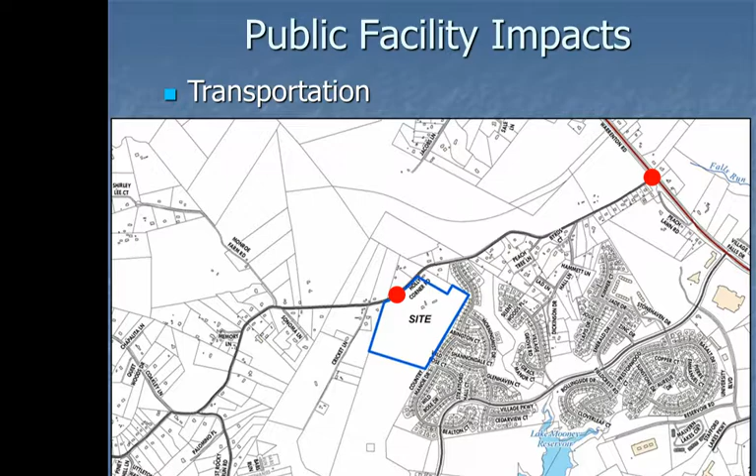Now looking at the other intersection, the Warrenton Road and Holly Corner Road intersection, the results of the TIA indicate that the site development would have a negative impact on the intersection at build-out in year 2022 if there was no mitigation. Specifically, it looks at specific traffic movements and identified the problem occurs in the eastbound approach on Holly Corner Road to Warrenton Road, identified with the red arrow.

Question in reference to the intersection: are there plans to put a traffic light there, or do you know? I'm not aware of any plans for a light there. That hasn't been determined as part of this. I understand that, but I just wondered if you knew. I'm not aware of any plans for a light. No.

This table, part of the traffic study, identifies the level of service conditions at this intersection, as well as queues, which are a measurement of the length of vehicle stacking that occurs at an intersection. The eastbound approach traffic movement is highlighted because that was identified as the biggest problem. You can see that the level of service is a failing F currently and is expected to continue that way into the future without this project.

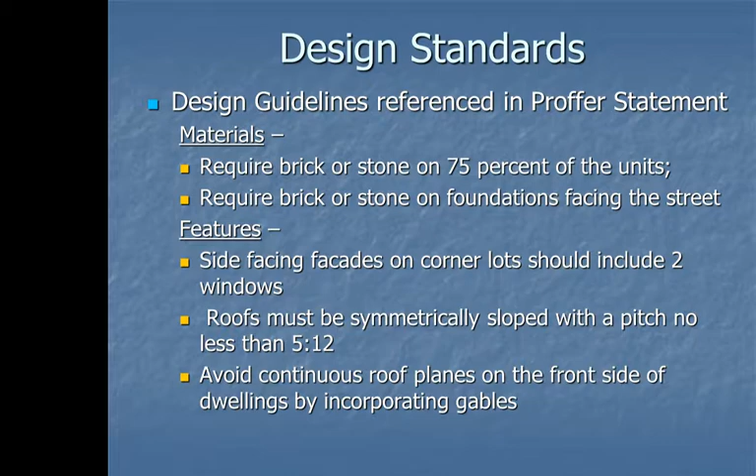Late last week, the applicant did provide these exhibits of potential home designs to staff. They are not part of the proffer statement because the applicant does not have an agreement yet with the home builder, but they did want to provide these elevations so the commission can get an idea of what the homes may look like.

Reviewing the summary of the overall proffer statement, the proffers would establish a maximum of 120 single-family detached dwelling units. R2 zoning does allow townhouse dwelling unit types, but through these proffers, they would limit the dwelling unit types to only single-family detached homes.

Also, they establish the character and quality of architectural design of the homes, require construction of the tot lot prior to occupancy of the 60th unit, require the right-of-way dedication and transportation improvements along Holly Corner Road that were reviewed. Also require the phasing of site access to ensure that the initial phases would require access off of Holly Corner Road, with interparcel connections happening through to Stafford Lakes Village at a subsequent phase of development.

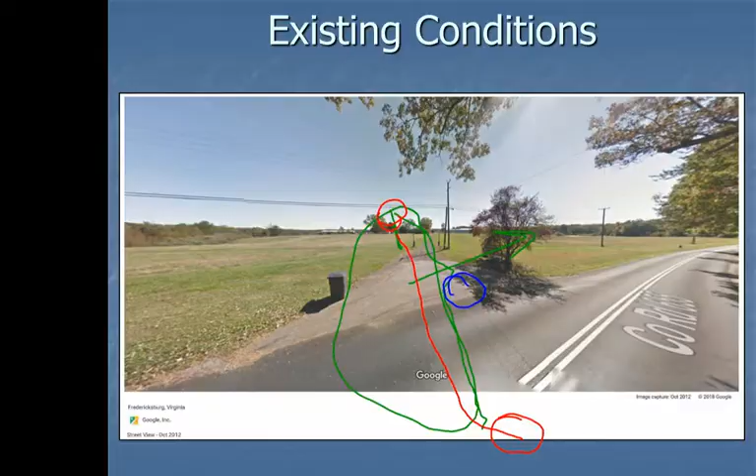Okay, so I just want to run by some zoning categories and the allowable residential units based on a 48-acre parcel. You tell me if my numbers are right. So A1, which is 1 unit per 3 acres, that would yield up to 16 units, right? Correct. A2, 1 unit per 1 acre, that would yield up to 48 units. Correct. R1, which is 1.5 units per acre, would yield up to 72 units.

Yeah, sounds right. And you've indicated that in this case they're requesting R2, which is 3.5 units per acre. That would yield up to, you said 170, I got 168, and they've proffered a cap of 120 units.

Correct. Can you tell me the purpose of A2 rural residential and R1 suburban residential zoning? Well, R1 is going to be smaller lots, typically 1/4 to half an acre in size, served by public water and sewer, and within the urban service area, close to amenities and public facilities. A2, generalizing, would be rural residential, single-family lots typically on a minimum of 1 acre in size.

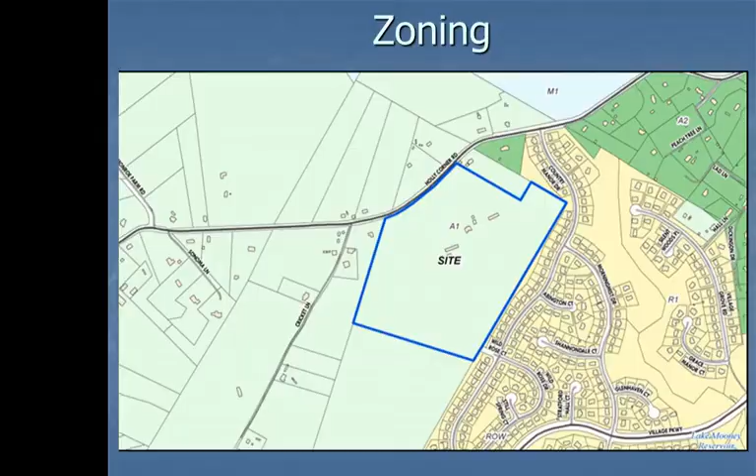Okay, so they've chosen to rezone to R2, and that seems to me to be a category that would yield the most units compared to A1, A2, and R1. I just want to throw out some deltas here. In comparison to R2, there'd be 104 more units than A1. In comparison to A2, it's 72 more units. And in comparison to R1, it would be 48 more units.

I just took the 120 and divided. Yeah. Although you might want to check, my math isn't always that great.

And so my last question is, are there any R2 zoned parcels abutting the subject parcel? No. No. All right, thanks. Okay, any other questions? All right.

Thank you, Mike. Would the applicant like to come forward?

Good evening, members of the Planning Commission. My name is Sam Shalaby. I'm with Development Consulting Services, 159 Litchfield Boulevard, and I live in the Hartwood District. I guess Mike covered a lot of the details, so I won't go through them all again, but just a few points I want to highlight.

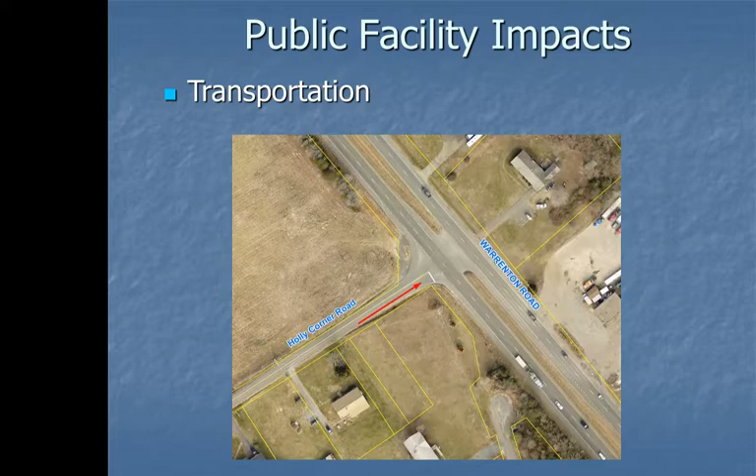So if you look at the no-build, it's 411 feet queue. We're taking it down to 98, which is less than a quarter of it. The improvement there, if you can imagine people having to wait instead of queuing up for 411 feet, now it's going down to 98. So we're bringing about almost 75% improvement. That's definitely an improvement from that standpoint.

The same thing with the other, the AM peak, which is 505, we're taking it to 160. Well, again, technically it does not make it a level of service better, but if you can imagine just the distance of how many cars that is and people waiting, they'll wait a lot less time and move a lot quicker. That was one reason we did it.

And again, we did that because we realized that there was some impacts from the project. And even though the TIA was designed, like Mike said, for about 130 units, and we were only at 120, we kept the same numbers to make sure that we covered the impacts there.

With regard to the schools, I know things change, and I know there's always concern about that. When I met with the school, we started this project almost two years ago, or a year and a half ago, and I met with the schools to try to figure out the impacts. At that point, Hartwood had no impacts. Hartwood had enough capacity. That was before some of the redistricting, which changes quite a bit. So at that point there was no impacts, and there were no proffers as we were looking at it.

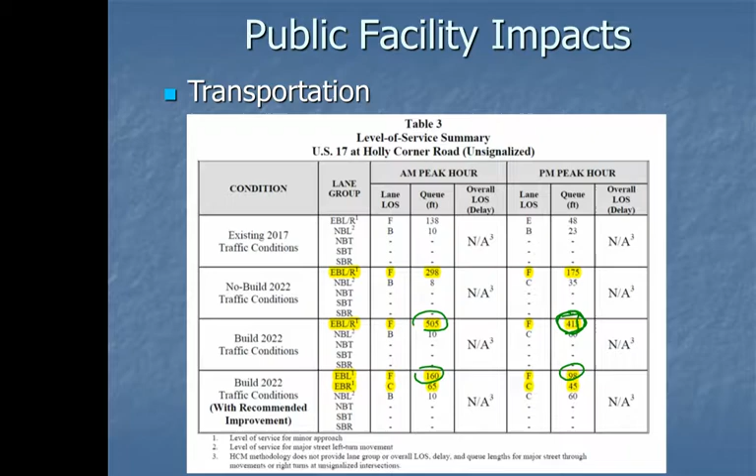With regard to the number of units, the reason we went with the R2 is we were trying to be consistent with the same type of houses as Stafford Lakes, especially since the access point was going to be through there. It made sense to have the same type of units, the same kind of streets, curb and gutter, sidewalks, etc., to have that same access up to Holly Corner Road. The only way we could do that and have it consistent was to go with the R2.

Obviously, with the proffers and everything else, we hope that offsetting mitigates any issues that we have in terms of transportation, in terms of schools, and obviously there is a component also for fire and rescue.

So anyway, again, I don't want to go through every single thing, but I just want to highlight those few points. If there's any particular questions that anybody has, I'll be glad to answer. Questions for the applicant? No questions? Thank you, Mr. Shalaby. Thank you. Appreciate it.

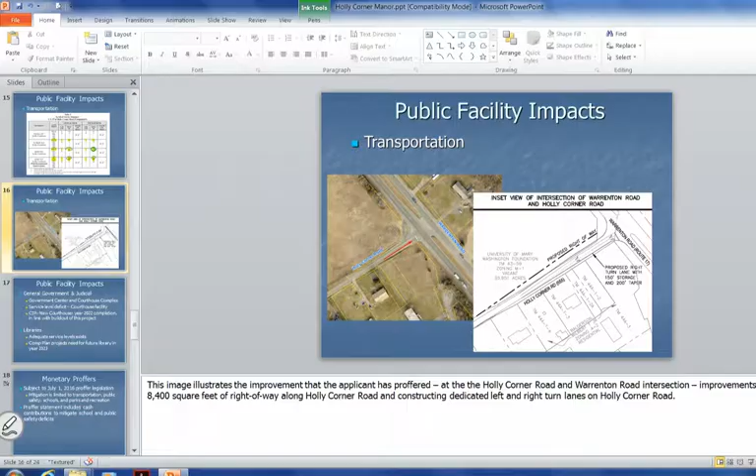Could you go back, on the computer, to the drawing of the road and the connection with 17? Yes. Regarding the right-of-way, you have access to that right-of-way? We've been in communication with the Mary Washington Foundation, yes, to be able to purchase that.

Okay, so it's still pending the purchase of that right-of-way. Correct, we have an agreement with them. You do already have an agreement with them? Correct, that is not, okay. Yeah, to be able to purchase that. Because one of the things also, there's a pump station designed to go in that corner for the overall West Lakes project, so we're also talking with them about moving that pump station, so okay, all that's being talked about.

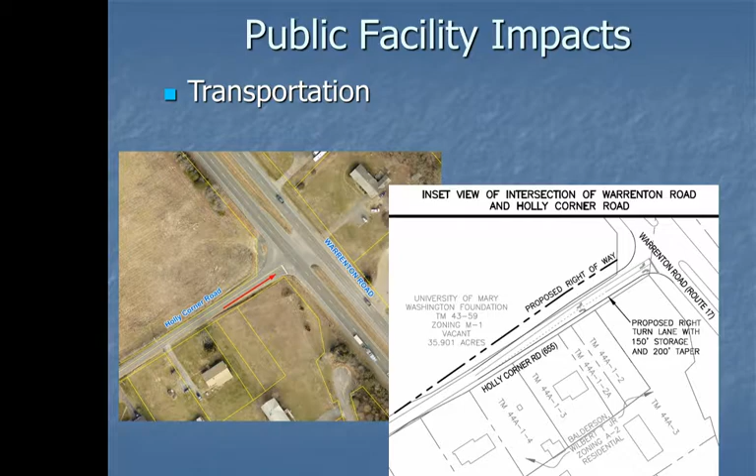And I understand that they also have a proposed site for an elementary school, because of their project having 700 or 800 units, so. All right, thank you. Anyone else?

Mr. English, I have a question for you. I'm not sure what you're going to do since this is in your district, but since you asked the applicant to do some more public engagement, do you want to leave the public hearing open? Yeah, that was going to be part of my motion, yes. Okay, thank you, Mr. Shalaby.

Okay, so I'll bring it back to the commission. Mr. English, this is in your district. Yes, Mr. Chairman, I'd like to defer this until at least the first meeting in November and leave the public hearing open.

Can we do it sooner than that? Was that going to give you enough time to reach out? No, if we get the information we'll send them out this week. And we have some contractual obligations with the current property. When's the next meeting in October, the last meeting in October? Because I think we only have one meeting in November, right? Right, yeah, that would be October 24th.

Okay, then I ask that you extend it to October the 24th, but leave the public hearing open. Okay, so there's a motion to defer until the October 24th meeting. Is there a second? Okay. Any further comment, Mr. English?

No, sir. Mr. Bain? Okay, I think I heard some get-backs, at least there was a get-back for me, maybe not directly stated, but implied. I would appreciate it if we would reach out to Stafford Public Schools and revisit the issue of how much it's actually going to cost to build this elementary school and what should be included in that cost determination. And I also understand the applicant agreed to do some reach out with the neighbors at Stafford Lakes. Is there anything else that we want or need?

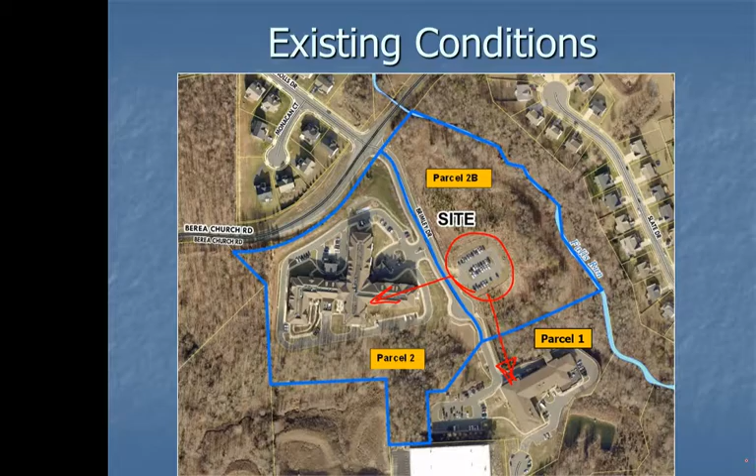In response to Planning Commission concerns at the last meeting, the applicant prepared this overall parking exhibit. It identifies where the 40 required parking spaces would be relocated, and also shows the 75 required spaces for the new nursing home, highlighted in blue, all within the nursing home parcel, parcel 2B.

The relocated 40 spaces are highlighted in yellow and placed in different locations: 4 spaces within the parking lot of the proposed nursing home facility, 25 parallel parking spaces along Brimley Drive, the access road into the complex, and 11 spaces in the parking lot of the Crossings at Falls Run.

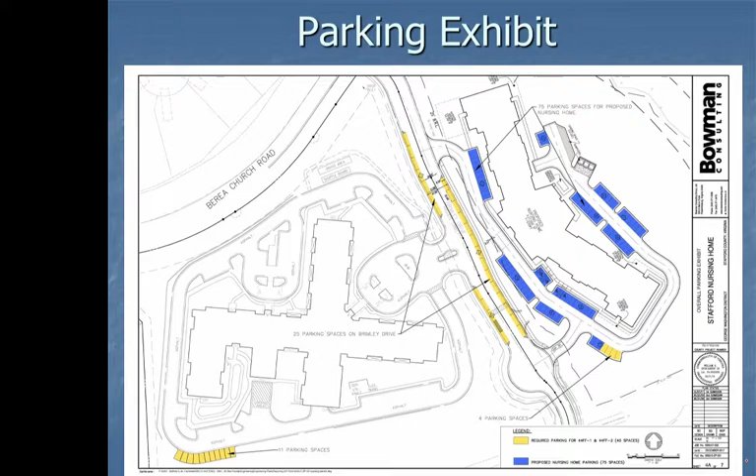The applicant also provided a complete history rundown of the parking requirements and how they were satisfied during the different phases of the development, going back to the initial site plan.

After staff sent out our review memo, there were some comments with questions and issues raised. One question was whether the project would be in conformance with the new parking regulations now under consideration, which deal with changes to parking space requirements, parking space size requirements, and travelways.

Regarding the parking space requirements for the proposed nursing home, it would be in conformance with the new regulations. In the latest draft ordinance, the required parking rate does not change from what we have currently: 1 space for every 2 beds, plus 1 space per employee of the largest shift, and that's how the 75 spaces were determined.

Regarding parallel parking and travelways, there's a proposed increase in parking space width from 8.5 feet to 9 feet, which would result in the project not meeting the proposed parking and travelway width requirements for the 25 parallel spaces along Brimley Drive. Currently, the travelway is wide enough to just barely meet minimum parking space width at 8.5 feet, with a remaining travelway width of 24 feet. With the new 9-foot requirement, Brimley Drive would be about 1 foot short of meeting the parking space and travelway requirements.

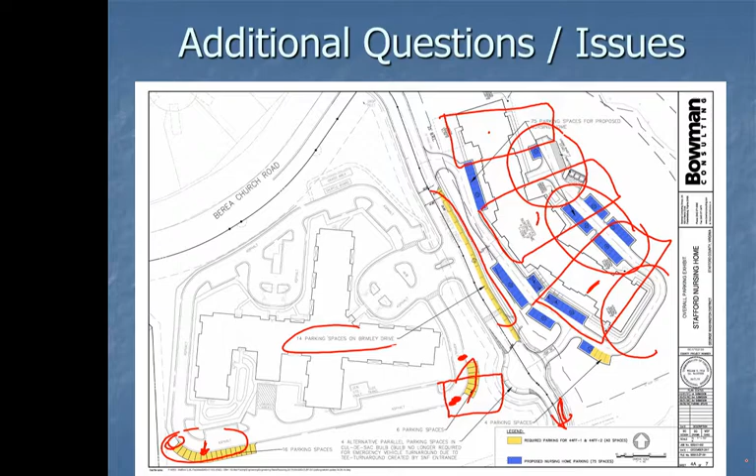I don't know if we have the original site plan scanned in, but the original design of this site had roughly 3 independent living buildings here, here, and here, with underground garages, and the 40 additional spaces we're providing in the areas highlighted in yellow were located in and around the garages of those 3 buildings. So even though they were serving the nursing home off to the south and the ILAL facility, they were still located even further away than the ones currently shown in yellow. So it was poorly planned from the very beginning, and we're trying to retrofit this revised design to the currently constructed portions of the site.

Madam Chair, I have one question. Ms. Randall? I have one question for the engineer. You've simply identified them in yellow to identify the amount of capacity required for those parking spaces, correct? The numbers, correct. They're not going to be restricted as to who can park where.

I would not imagine so. If I'm going to the current location, I literally can park in any open parking spot available, correct? I would assume so, yes. The ones in the yellow in the corner are simply because you needed to count for those extra spaces to get to the 40 required for the current location. Correct? Yes. Okay, so they're not going to be restricted one way or the other? It's all shared parking. Okay, thank you.

Any other questions for the applicant? Mr. Apicella: So where the 1, 2, 3, 4, 7 parking spaces are in yellow, what is that area just above it? What is there?

Sorry, which parking spaces in yellow? You could sit down. This group here? You've got your 2 dots, yeah. So what's the area to, I'll call it my north? If I remember correctly, there's a storm drain inlet there. I think there might be a fire hydrant located here, and there's a berm, kind of a raised area here. I actually have a copy of the original construction plan that I can refer to if you want to give me a moment.

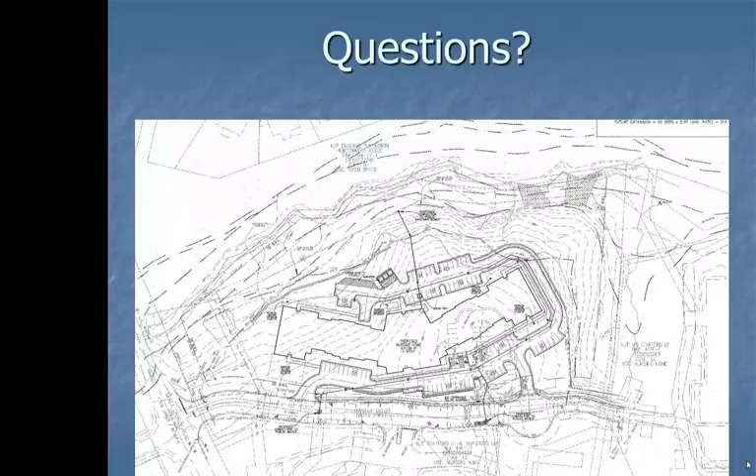That's all right. I just think, at least from my vantage point and what I hear from my fellow colleagues, is that it's just an awkward alignment of spaces. It seems like we're just trying to meet the numbers and scatter spaces wherever we can make it work, not necessarily ones where it's going to make sense for this particular use and location of different buildings. At least that's just my vantage point.

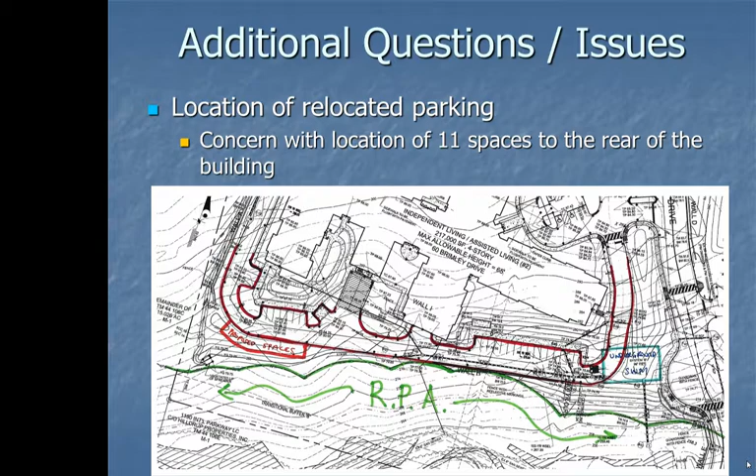And I'll go back to what I said earlier. If you go back to the previous slide, I just think the alignment of some of those spaces just doesn't make sense to me as a driver trying to park into a space. I just don't see how they're going to work in reality. It's great to have them on paper, but I don't see how they're going to work in reality, the ones that are all on the curve there.

I think they're okay, but as Charlie said, we can work that stuff out in more detail when we get to the site plan. So I guess my question to staff is, how do we have somebody who evaluates or does the reality check on whether spaces are really viable? Who does that for the county?

Madam Chairman and Commissioner Apicella, the county's review of parking spaces is primarily focused on: one, do they meet the number of required spaces; two, do they meet the distance requirement from the building; and three, do they meet the size requirements. So for the most part, we don't regulate the functionality of the parking spaces in any form or fashion, because some of that is subjective to the user. Some people like to park in front of the building, others don't mind parking further away.

Do we know any sites that have parking scattered in the way that this is proposed? I mean, do we have an example somewhere we can go drive to and take a look at and see?

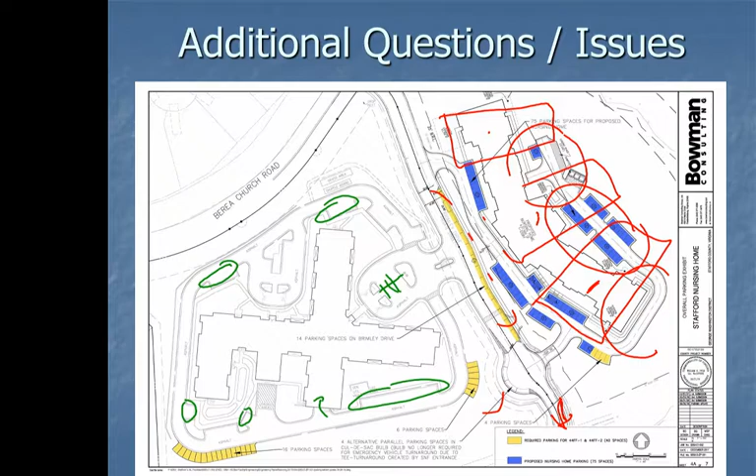Okay, thank you, seeing none, Madam Chair. Thank you so much, Mr. Payne. All right, so this is not a public hearing, so we're going to bring it back to the commission. Mr. Bain, this is actually in your district. What would you like to do this evening?

Madam Chairman, I'm not happy with the parking, but I do have faith that county staff during the site plan process could work it out and come up with a better solution than what's been shown here tonight.

So I'm going to make a motion that the application be approved. Motion on the floor to approve, with a second by Mr. McPherson. Any additional comments, Mr. Bain? No. Mr. McPherson? No.

Anyone else? Mr. Apicella? I'm going to support the motion, but I still have a concern, especially since what we heard from Mr. Harvey is they don't really look at the viability of whether spaces make sense or not. They just look at whether or not the code requirement has been met. So I appreciate what you're saying, but I don't think that's what they're going to try to accomplish at site plan. They're just going to see whether the numbers are adequate.

Okay, thanks, Mr. Bain. And I saw him at a TRC meeting today, so I know he will be there. Does anybody else have any additional comments?

Okay, I just have one comment that I would like to make before voting. I'm going to support the motion on the floor as well, and I do believe that you guys will be able to work with staff and with the site plan to adjust the spaces as needed. I'm not crazy like Mr. Apicella said about the ones on the curb, but I do think that you'll be able to move it around.

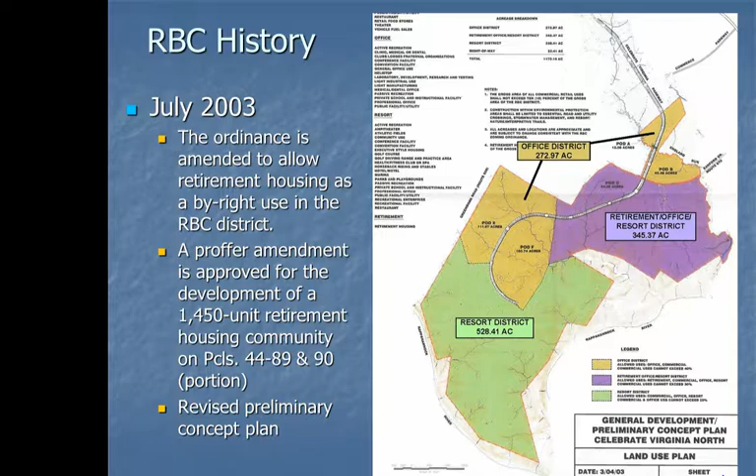The revised preliminary plan is shown here with that shaded area. The combination office resort pod and the commercial pod were removed with this change. However, commercial uses can still be constructed in the other remaining districts. The retirement office resort district is added, which displaced around 74 acres of the office district, as well as some of the resort district.

In October 2013, the ordinance was amended again to allow multifamily dwellings with a conditional use permit in the RBC district. And 18.19 acres was rezoned from M2 to RBC, and that area is shown here.

A conditional use permit was also approved to allow a 192 unit multifamily development. The preliminary plan was revised once again with the multifamily district added as a new district, and the resort district was also expanded to encompass the executive housing development. These changes resulted in about a 100-acre reduction of the office district.

In 2015, the ordinance was amended to increase the maximum area of multifamily from 1.5% to 2.1% of the gross area of the district. A rezoning was also approved for 14.73 acres, generally shown here, from M2 to RBC, as well as a proffer amendment on that parcel. A CUP was also approved, which replaced the previous CUP and allowed a 278 unit multifamily development on the parcels.

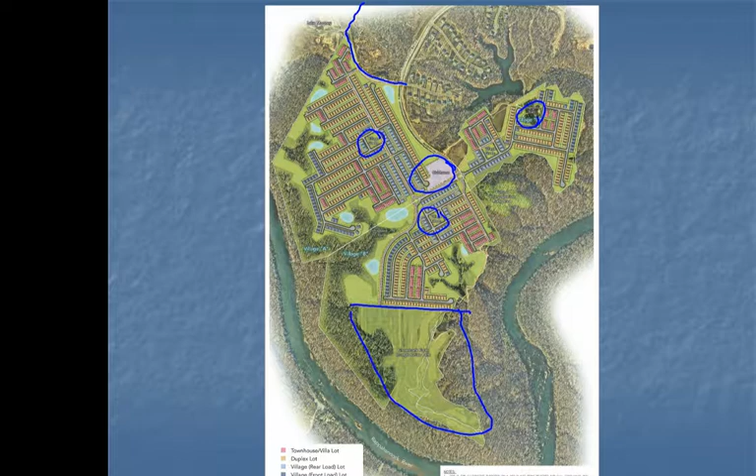So Madam Chairman, would the commission want us, as staff, to come back at another meeting and give you a briefing about what's been filed so far with the zoning change?

So I guess let's look at the timeline here, because I think the timeline is December 7th, which is good, but that means we have to vote on it by our November 14th meeting, unless the board gave us more time. So that means we have 3 meetings before we have to take a vote, and we have to authorize a public hearing, correct?

Correct. We need about 30 days notice typically. Public hearing will be 30 days after you authorize it. So if we didn't vote this time and voted at the next meeting, October 10th, that would put the public hearing at November 14th, meaning we'd have to vote on it at the very first public hearing.

Correct, unless the commission asks the board for additional time to consider the ordinance amendment. Okay. And if we decided tonight to send this forward to public hearing, what kind of sweeping changes could we make to the ordinance without messing up the advertising and public notice requirements?

Madam Chairman, typically there's some latitude allowed, but you can't really change the effect and intent of the overall amendment. You can't create new aspects of the amendment. In some cases, you can be more restrictive than you advertised; in other cases, you cannot add additional things you didn't advertise. So there is some flexibility, but also limitations in how you can modify the ordinance after you've authorized the hearing.

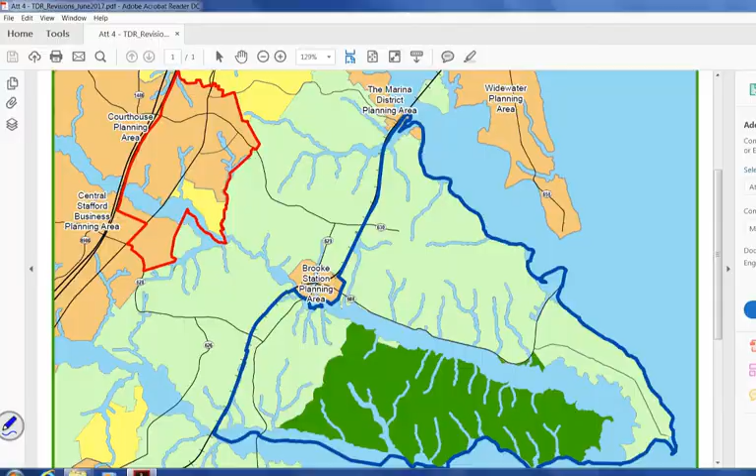This next map shows the original sending area and the eligible parcels. This map reflects in blue the potentially eligible parcels to sever development rights and send them.

This area is primarily bounded by Brooke Road and the CSX rail line to the west, with Aquia Creek, Accokeek Creek, and Potomac Creeks off to the east. This is an area where we don't have public water and sewer. Some of this area coincides with the park designation on our comprehensive plan for the Crow's Nest Nature Preserve, so these potential parcels could sever their development rights and send them to the receiving area.

Currently, we've only had one property owner sever development rights, and that owner severed 50 development rights with their project. As part of that process, they have to file an application with our office to determine how many development rights they have on their specific piece of property, and the code stipulates how you go about determining that.

We have to have them provide a survey of the property, and we subtract out any hydric soils, steep slopes in excess of 25%, right-of-ways that have to be dedicated, and easements and other things. From that, we take total acreage and deduct those items, which tells us how much buildable land they have. From the amount of buildable land, we compare it to what the zoning classification allows for minimum lot size or density, and that determines how many development rights they have.

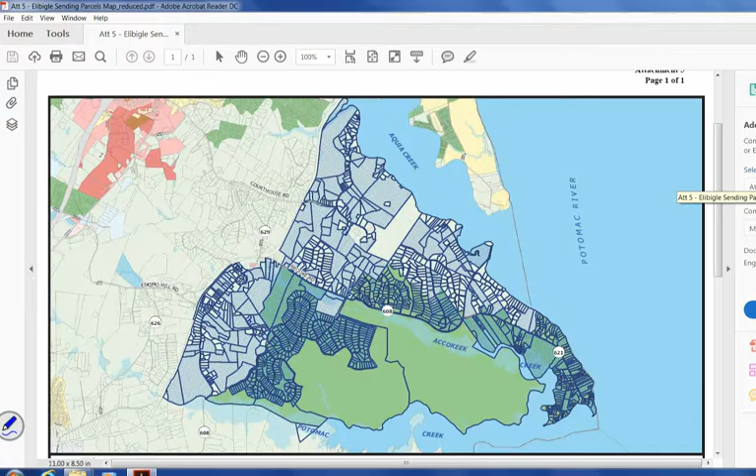Go ahead, Mr. Harvey. And the next map I'm going to pull up is the receiving area map. This is the receiving area map for the courthouse area. I'll have to make it a little bit smaller to fit a little better.

When someone transfers a development right, they have the option to use that single development right as either one dwelling unit, whether it's an apartment, a townhouse, or a single-family home, it's their choice, or they can convert it to 3,000 square feet of commercial or office space. So they have the option to do either one.

So for those properties that sever their development rights, there's a couple things that can happen. One, that person, if they own land in the receiving area, can directly send their development rights that they own in one part of the county to another. If they don't own other land in the receiving area, they could sell their development rights to somebody who's pooling them, and that person that pools them from multiple sources could land them on property here within the receiving area.

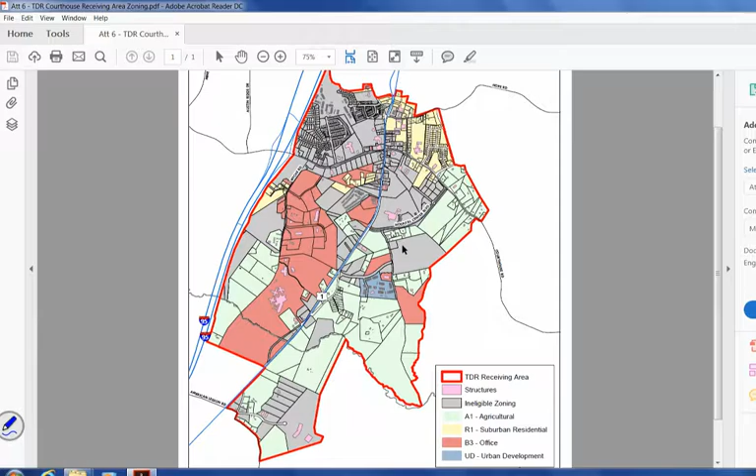And the extension of those sewer and water lines, would the developer pay for that, or would that be part of the county's infrastructure requirement or responsibility? Commissioner Bain, it would depend on whether it's a master plan improvement or not. Normal development, the developer provides the sewer and water to their project. But in some cases, if it's a master planned improvement needed for our comprehensive plan and full build-out of our planned development, then they may be eligible for reimbursement of some of the costs to build that.

All right, thank you. Anybody else? Okay, so we do have to take action on this item by December 21st, so I think we have a little bit more time to talk about this. Does anybody have an opinion on how they'd like to see this move forward? Any requests of staff before the next meeting to follow up on? I think your suggestions to get additional information on land ownership would be helpful. Okay.

And if you could project what land is completely covered in RPAs and swampland and things like that, that would be helpful for us to understand what's buildable versus not buildable. I would suggest that same attachment 6 be provided as a separate document so it's clear and right in front of us so we can see it.

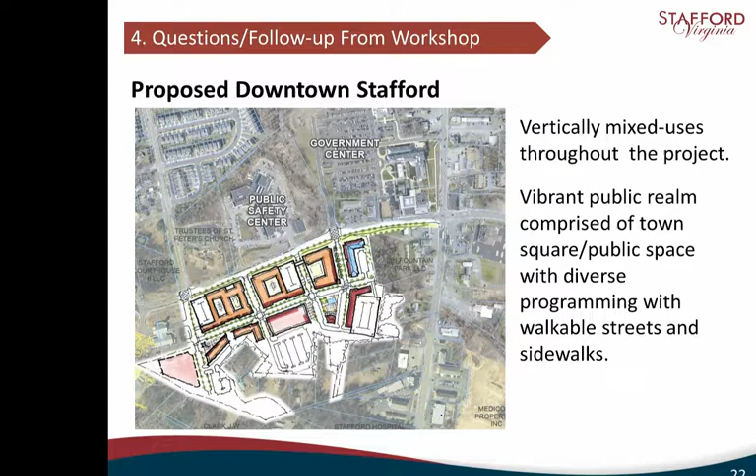So we're starting to work with the Board of Supervisors, and we're going to keep the Planning Commission apprised of what's going on. The board is working with staff right now to consider rezoning the county's property to potentially the UD5 zoning category, and it would be a board-initiated zoning change, with the end goal to negotiate a public-private partnership with a developer in the spring of next year to potentially work with them to help us build the infrastructure and start building downtown. So that's the direction the board's going in, and it's going to need participation and understanding from the Planning Commission. There'll be more to come.

We can certainly bring other staff in to talk to you in more detail as we move through this process, and or bring our consultants if we need to. And that concludes my discussion of this item.

Thank you, Mr. Harvey. County Attorney's report, or wait, do you have to do the bicycle and ped plan? Yes, and Mr. Googe is going to give an update on where we are with the outcome of our survey.

Good evening again. Should have a handout. We wrapped up our online survey. I believe Mr. Harvey reported on that briefly last time. We had 538 respondents in total, and we've compiled the results of that survey into various charts and graphs.